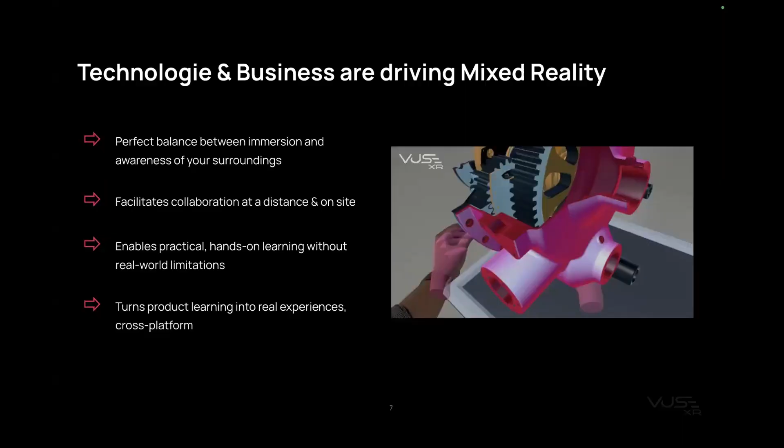HR has also lately been a focus for XR technologies, with AI agents doing soft skill training. This is not a focus for us at VUSE-XR, but it's a bigger movement in the industry—HR and skills development at the soft skill level via integration of AI agents is a booming thing in XR tech.

Speaking about industries—and this is very close to our heart because we come from the industry and are an industry solution—machinery, life sciences, and automotive are certainly the industries driving XR and having the highest adoption rates.

Perfect. I only have one slide, and then after that I will jump into the tool because it's the more interesting part, at least for me.

What Niclas didn't really mention yet is that we, as VUSE-XR, are working on the VUSE-XR Hub. The hub is what we call our tool, so it's the one source of truth for everything, for every input, for every editing, and also for every output. You access the tool via web, as you already mentioned.

We use or apply WebXR as our basic technology to create and share content, and you access it on your web browser, and you can also access it on any HMD or general XR device, and also on any browser, of course.

So that means since you're using WebXR, you are independent from most of the hardware. Is that true? Yes. Do you run on MetaQuest, you run on Apple Vision Pro? Yes. And also on an iPad or a PC? iPads are a bit problematic, but we're getting there.

We will probably develop a native app for iPads, for iOS in general. Vision OS is a bit special. Vision OS supports WebXR, but iOS is a bit more constrained, let's say.

So that's a huge benefit for you because you don't have to develop for individual platforms. Exactly, yes. When setting up our infrastructure, it was an active decision to go with WebXR.

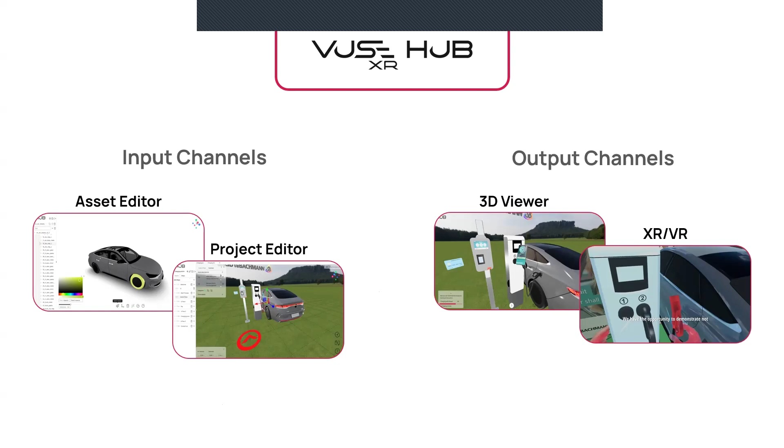I've seen in many different fields that if you have a code environment, you have less people to work with it, and it just gives you constraints in working with it. So I was a production manager for some time, and I introduced a tool for recording data in production, and that was also a no-code tool. By that, I could use the technicians and engineers I had in my department, whereas other departments were relying on external sources like R&D department or IT, and they never found time to do those things.

He was production manager. I understand. This is maybe just an anecdote.

Before founding VUSE-XR, Daniel and I, by coincidence, both worked at the same VR agency. So we come from the old world of software coding, project business, 6 months until your very nice XR or VR project is standing, which from a quality perspective is super nice. However, it's not scalable for the customer. So that has been the whole motivation of starting VUSE-XR, reducing the time from data to XR Twin and from idea to content. That's the whole founding story.

Yeah, or also improvement of, you're doing a digital twin and then you get an idea to change something. If you rely on somebody doing it for you, it's gonna take another month or more. And a couple of thousands of euros. So that's the second part. So it's time and money. Correct. So we really want to make it as easy as possible, meaning we also want to pull as much strings as possible, let's say, from external tools into the hub.

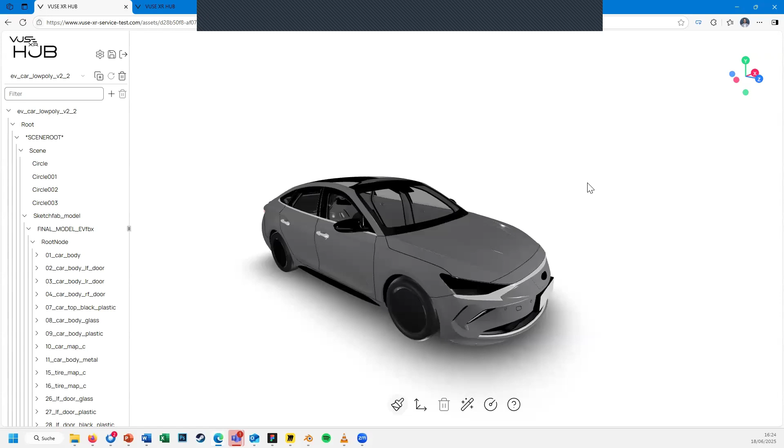As you saw in the slide previously, there are input and output channels. I will first focus on the two input channels, the asset editor and the project editor, show you a bit how it's done, what you can do. And then I will also show you some examples of how this transfers into XR.

You can simply drag and drop any 3D file, for example. Almost every 3D or CAD model is recognized by our tool. So it can even be a step file or anything else you have lying around.

Sometimes it makes sense to take some parts out of the step file before you put it into the hub, because if you have 40,000 parts in your file, you will run into problems. You have to delete them somewhere, and in such cases it's easier to delete them externally. Just one example. But other than that, if you have a car with, as we see here, 47 parts right now, if it's a step file you can just drag and drop it and it's uploaded.

We have a question. So you support standard files like OBJ? Yes. STL, but there's no color to it. FBX, GLB, GLTF, yes, and almost any CAD format, yes. How about USD or USDZ? I think our tool supports it. I don't think we tried it before.

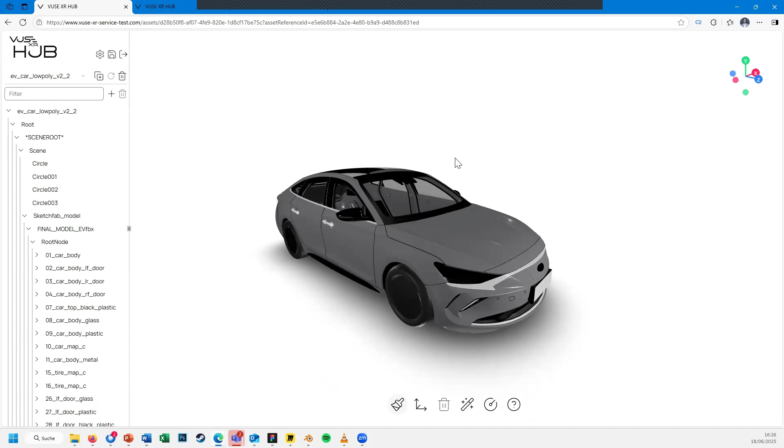After you upload your file, what I always do first is check the performance. We have a few metrics we can access right away, for example the meshes, draw calls, and triangles, which are always important. The memory is a bit minor important, but if you have 1 GB of files to load on your headset, that takes some time, so of course you want to optimize that too.

For high poly assets, there are options to optimize. If you have something above 1 million or 300,000 polygons, you can choose this option and say you want to optimize it to a really low poly count. You click on this and it takes a few seconds to optimize. Let's hope this works now. And you get from whatever you are, 300,000 polys, to, in this case, 30,000.

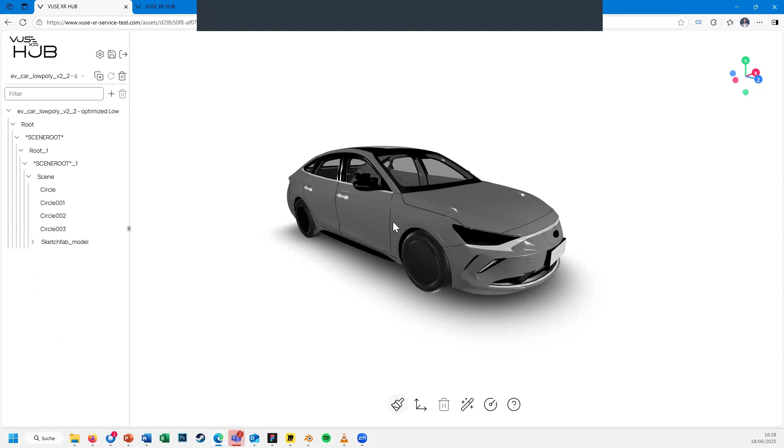Is that reduction somehow intelligent? Does it take into consideration the curvature? Yes, it leaves more polygons if you have curves, and if you have a flat table, it reduces it to a minimum of 2 polygons. So there are some thresholds, it has some intelligent thinking. It deletes polygons that make no sense, like loose dots, and it recognizes edges and curves and so on. We thought about giving all these choices to the user, but it probably makes more sense to handle that internally and just give the user the choice about poly count, which is most important.

We will probably also implement the feature to give the user the choice to remove occluded geometry, if you only want to look at the shell, for example, and all the inner parts are not important.

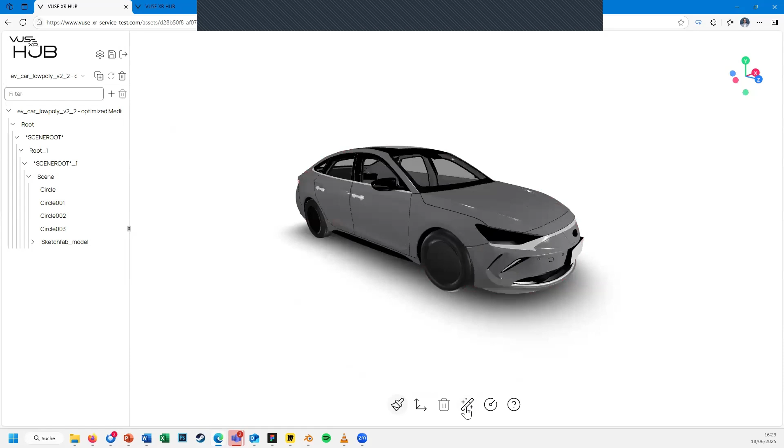So you see the optimization went through. You can also see I already did some optimization of this model before, and now this one has a poly count of 30,000. I can also switch to the other one, I think this one is the 100,000... yeah, so 99.99. So you have options to optimize your assets, and that's of course the first step.

You can also give it a few colors or rearrange stuff. So if you want to make all the glasses a blue color, make them a bit transparent, that is possible here. Depending on what you like, maybe you have tinted glass, maybe it's a bit more black, you can do it however you want. Right now you can give them a lot of color free of choice. We have some predefined materials, and metalness and roughness you can also define.

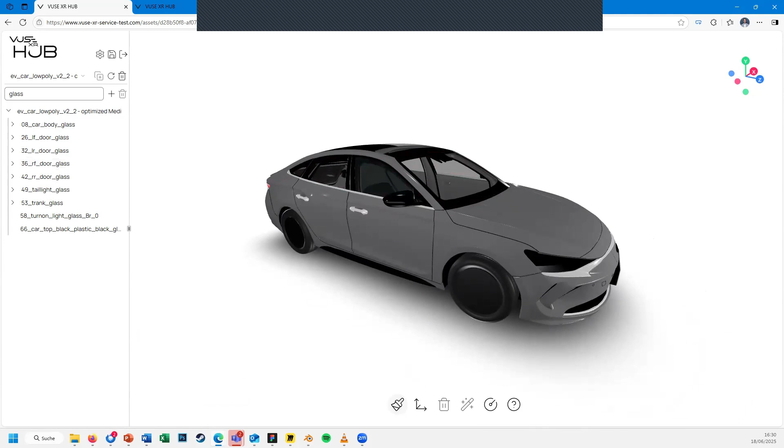Textures, real textures with effects and everything are not included yet, but that's also a feature we will work on soon. And then, of course, you can also move parts. So if you want to place the glass somewhere else, or if you want to fully remove the glass, that's possible. So you have some tools to do that.

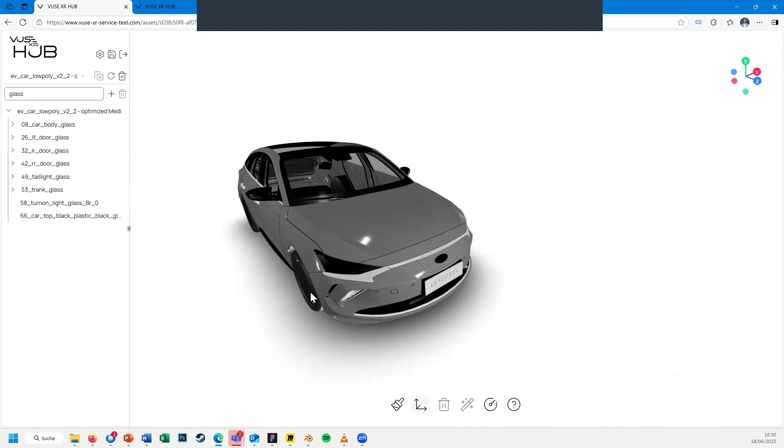Do you have a back function so that you can go back? In this case, we don't have an undo redo function yet, but we have an undo changes function, so we go back to the last save state, which was in this case after the optimization. So now the glass is back. Soon we will also have undo for a few steps, like up to 5 steps you can undo.

Another question - you mentioned you can take away occluded parts, but when it comes to XR, are you using occlusion when you use it? So if I place my hand in front of a virtual object, will part of the object be occluded by my hand, or will it appear in front of my hand?

Your real hand is behind, but we have a virtual clone of your hand, a visualization which is visible. So you will see your hands in a way, yes.

We have that application sometimes when we want to do an assembly training, for example, and we have a fixture - in one of our projects now with a company doing composite materials, they have a metal fixture and you have to place material onto it. We wanted to show where the material has to be, and if you have it placed on the object and then use your hand to place the real material there, the virtual material will appear on top of your hand, which is kind of irritating.

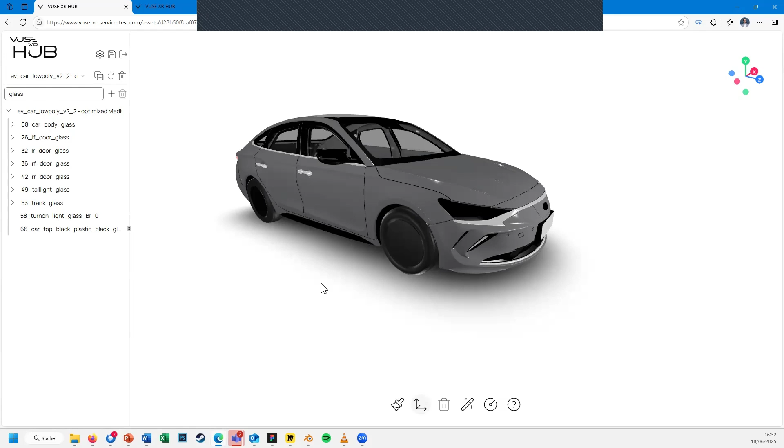Just a few more hints on what you can do here. As I mentioned, you can modify the materials, you can modify the whole asset or the sub assets, and you can add some sub nodes. For example, if you want to rearrange nodes into each other, you can drag and drop them, or say you want a new sub node, you rename it - maybe you put all the glasses in one node, etc., depending on what you exactly want to show. Maybe you want to have all the glasses later fly out of the car or whatever.

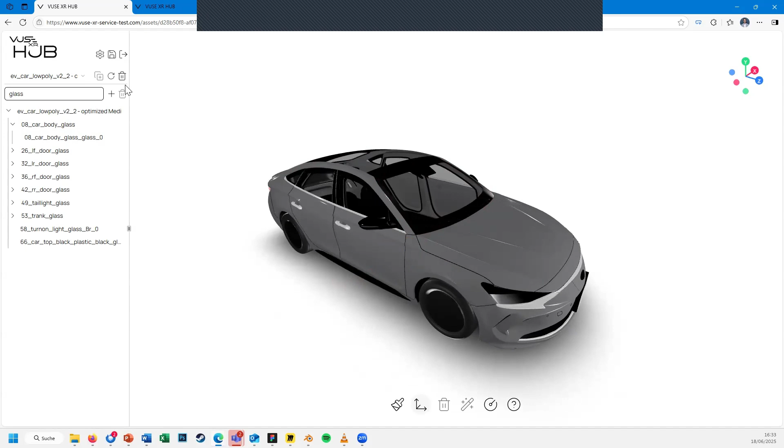You can, of course, create copies of your car. So if you want to have a blue and a red car, one with or without glasses, you can do that as well - you have to save, of course, before you do a copy. And you can also add some descriptions if you would like, so this is the gray car, for example.

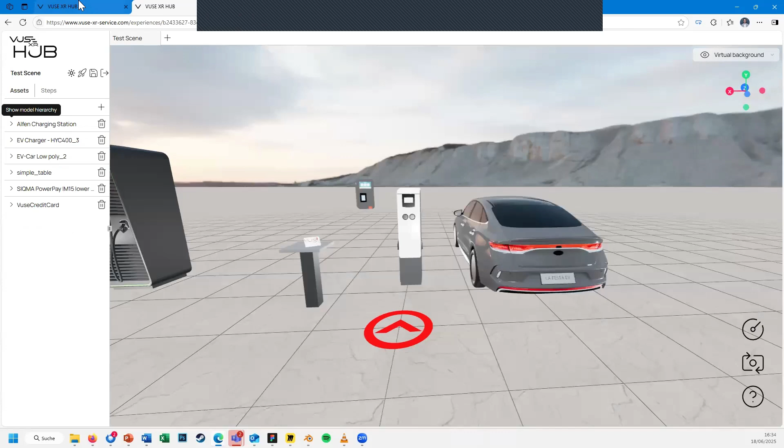That's, I think, most of the important info for the asset editor itself. Now going to the project editor.

Since Christian is here, I thought I'd pull up one of the internal test and review projects we made, to have a look at the scene itself. So this is the PowerPay here from Scheidt & Bachmann.

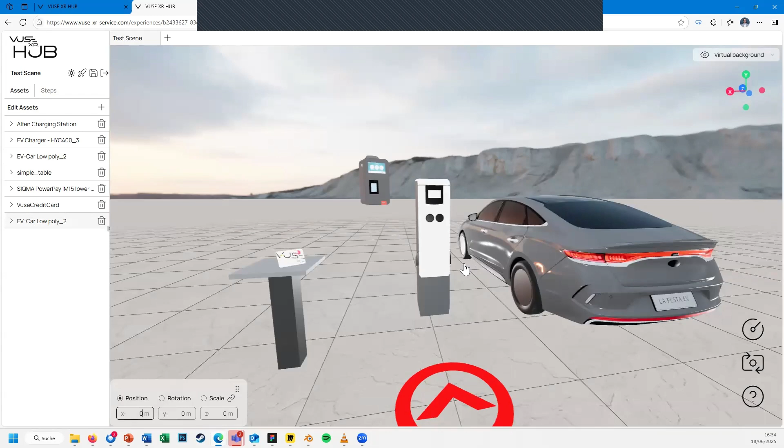You can see the Alfen charging station, the EV charging station, the car itself, and the credit card. Those are basically objects that were dropped here in the scene. Let's go to EV car and put this car in the scene, and you see it's the same car. I'll delete it again so it doesn't disturb us for the rest of the session.

But that's basically how drag and dropping assets here works. You can also upload files right here if you have a small, maybe not too important asset that you already have prepared. You can just upload it right in the editor and place it in the scene, and you can also create some special assets right now.

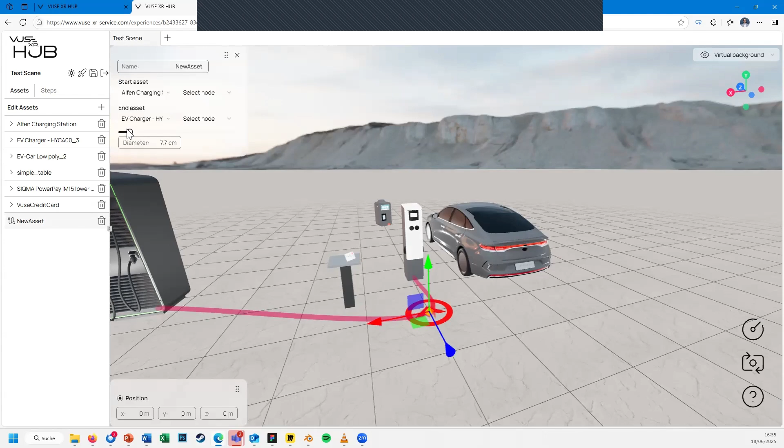Special assets in this case means cables. We just defined that feature for adding cables to your scene. You can adjust them in different ways, for example diameters, but that's just a small feature, maybe not important for now.

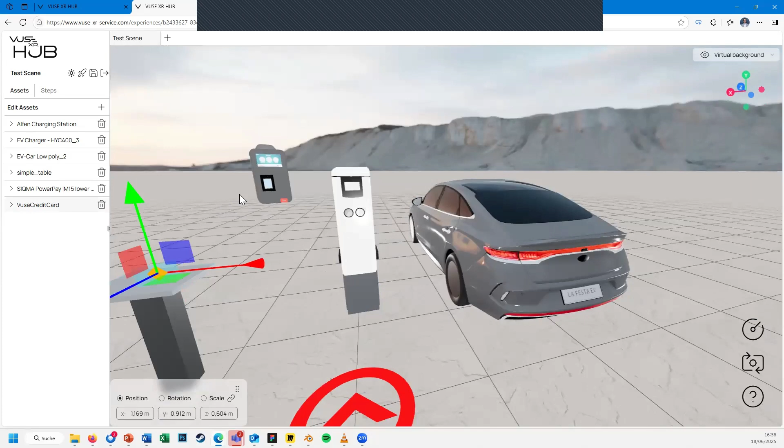Generally, you have your scene here, every asset placed in there. You can navigate around as you would in most 3D tools you know from somewhere else, and you can click on everything. The parts are then displayed here on the left. They are highlighted so you can see what you're looking at. You can, of course, also click here.

You can set different backgrounds. For example, one of our standards are those misty backgrounds, HDRIs. We have a grass field here and a chalk quarry. We also want to move towards a feature where you can upload HDRIs or 360 files, but we're not there yet.

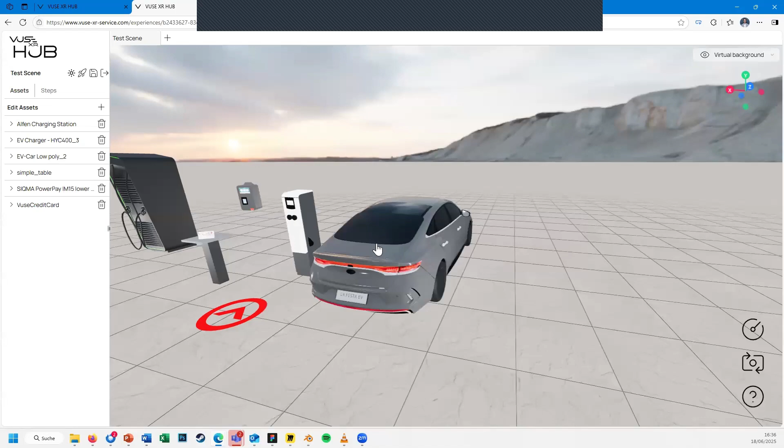And this one's my personal favorite because I like sunsets. Similar to the asset editor, you have a little performance dashboard. In this case, it covers the performance of the whole scene, which is most important for you—you want to see how much is draw call for this project, or specifically for this scene, if I load it in my headset, so you can take that into account and optimize if needed.

I have a question for the import—so you showed importing another car. Will it always be imported to the 0,0,0 origin of the scene? Yes. So every file you select here is basically then placed in the middle.

And then you can move it around, rotate it, and also adjust the size, so you don't have to search for it, that it is somewhere in the scene. It's always set with scale 1,1,1, and then you can adjust it, rotate it. You don't have to search for it—it's always there. The red arrow marks the middle of the experience of the scene.

If you're using a head-mounted display, that is also the place where the user spawns, so it's the reference point from the headset to all the different assets.

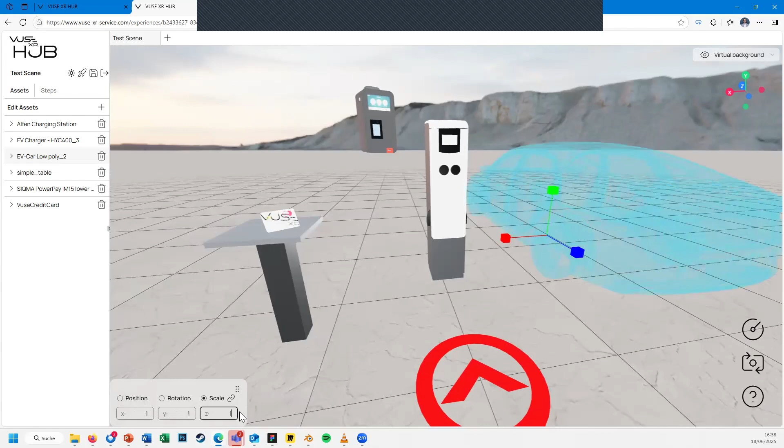I think it's important to mention that you do not need to move things around only with the cursor. You can also place them mathematically correct with the X, Y, and Z coordinates. So if you know it's 20 centimeters, you can just apply 20 centimeters as a distance, or rotate it 45 degrees.

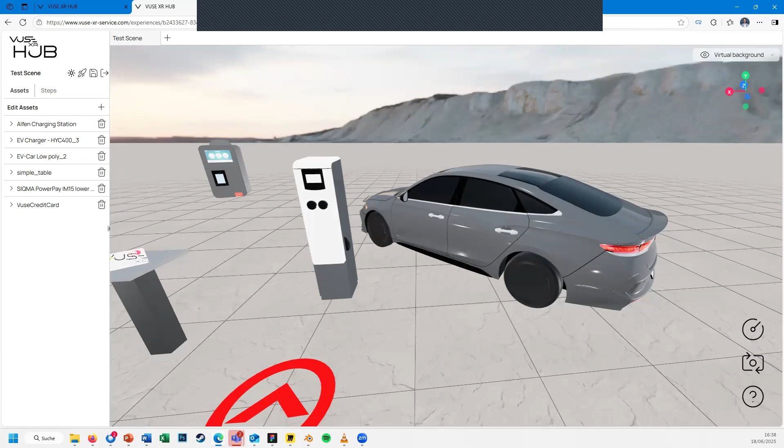Question from Arun: is there any option to place objects with reference to another object that has already been placed, or does it have to be 0,0,0? Right now it has to be 0,0,0. We are thinking about snapping files to each other and to planes, for example, which I think would be a very nice addition at one point. But right now it's basically fiddling around with the controls to find the perfect spot.

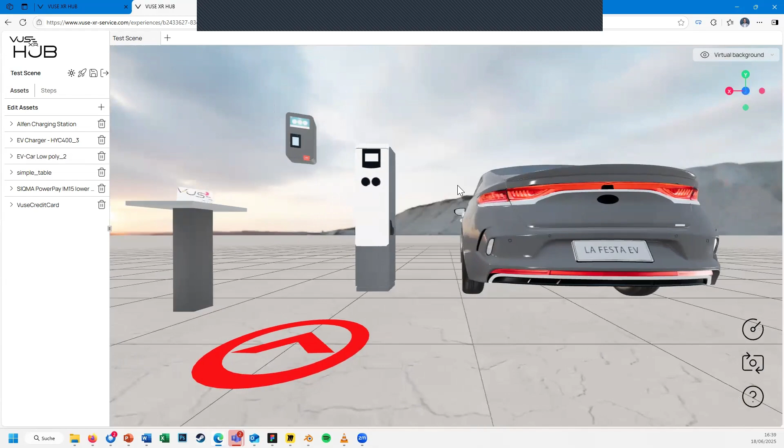You can of course switch to different views on the upper right side, for example to have the perfect straight view. But if it comes to assets that are positioned at an angle, it's adjustments and fine-tuning that you just have to do at one point.

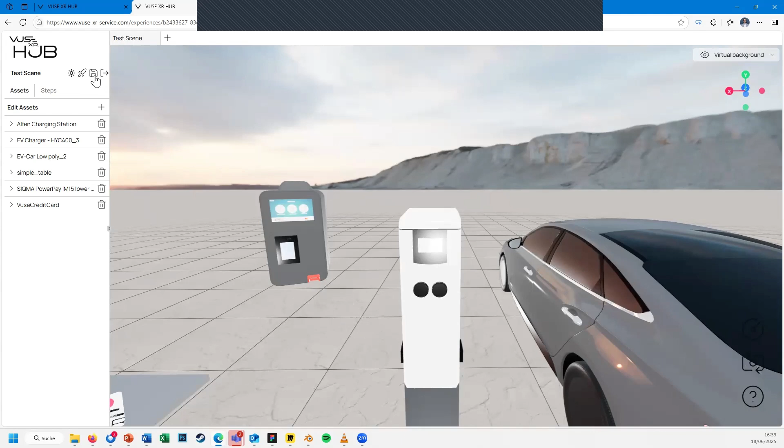So that's the basic placement and setting up of a scene, making sure everything is in the right spot. You can set your camera like this to get a rough idea if everything is positioned correctly. You can also, at this point, just save it and pull up the same experience in XR to have a look at it.

Or if you already know what you're doing, you can just go right away and add the content—the actual content that is interesting. Because looking is nice, but doing is nicer.

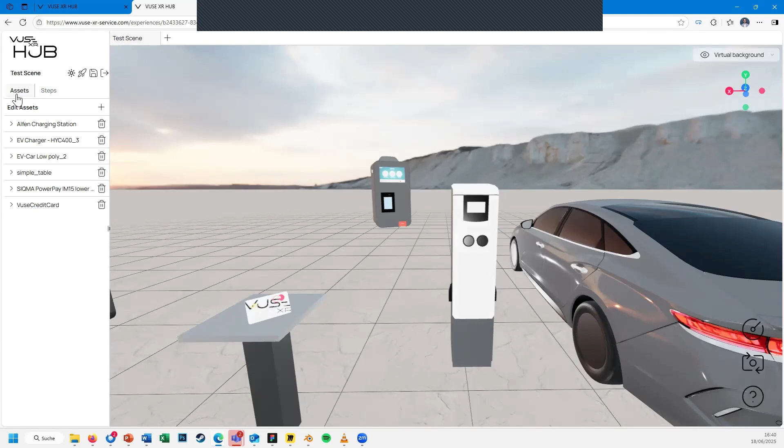And that would be the transition from the assets tab to the steps tab. If you look at the left side of the screen, there's assets and then there's steps, and the steps are what you make of your assets. I added some test steps here, step 1 and step 2. Both have one interaction or content so far, and you can just go ahead and add additional content.

If you look at this one, it's grab and place. As a user, I would grab and place the credit card here in front of the PowerPay. That's the basic interaction. It's also possible to do a grab and move, or grab and rotate—grab and move along a defined path, or grab and rotate around a defined point of origin or axis. Then there are a few additional sophisticated interaction types: animation, highlight, explosion view, cutting plane, a UI interaction where you can display content, or a simple trigger interaction.

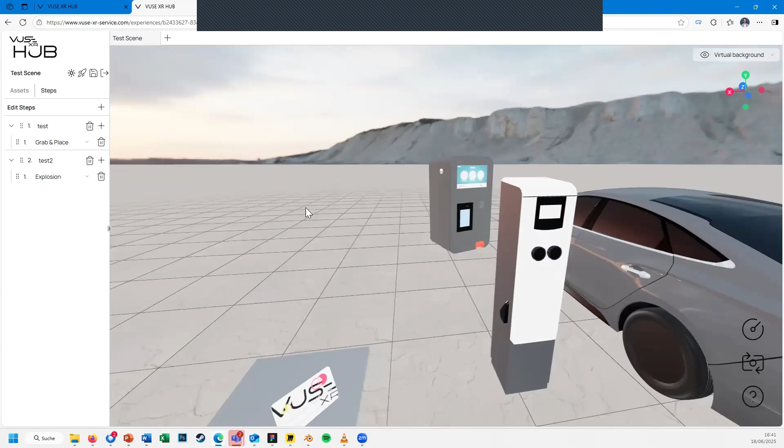I will show all of them with a bit more detail as well. Is that an answer to your question? Yeah, okay, I can wait until you show it.

I was asking what grab and place means. So you will display the destination place with a transparent object, and then you can take it and move it in all dimensions until it gets to the transparent ghost object where it exactly should be. So grab and place in XR terms means that when you grab it...

First off, there is a highlight or a guidance system in XR itself, which will display everything you need to know, because in XR it can be guided, but it will mostly be a self-guided interaction sequence. You will also see more about the different guidance elements that we have.

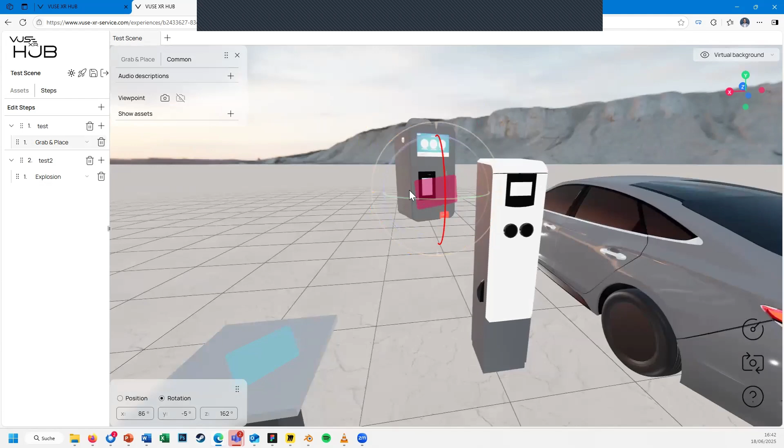But yeah, grab and place would be just simple—in this case, I defined grab the credit card and place it here. I can adjust it however I want, and of course also rotate it around, however the credit card in this case needs to be placed in front of the device. How do you assign the grab and place?

So we get into steps, and this was assigned to the credit card. So where do you select the credit card grab and place? Exactly—so I would now add basically one interaction per type and explain it in more detail. But good question: the first step, you click on the plus and select one interaction type.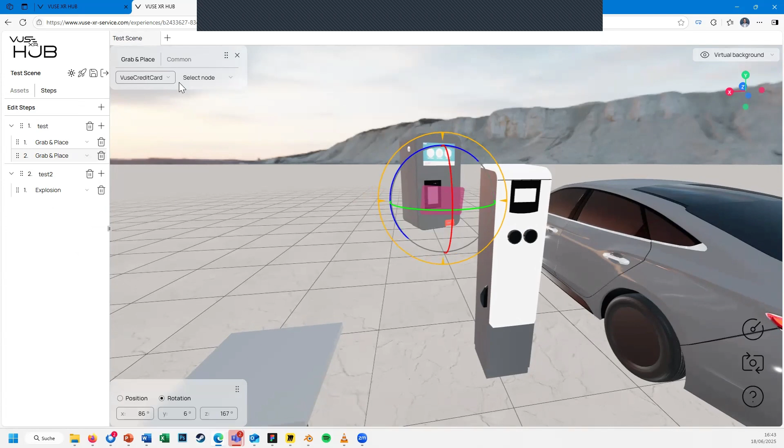Grab and place, which I just described, is defined as you grab one object and place it somewhere. This can be the whole asset—for example, I could grab the whole charging station, I could grab the car if I want, or grab the credit card again, and then place it, for example, on the left.

I can also do this if the object has a subnode. For example, if I select the car and select a subnode, I have to know what I'm looking for—let's say I want the glass. In this case, the user would need to grab the glass and place it on the side. So subnodes are available as well.

That's good for assembly or disassembly relations. Exactly—the basic idea is you import the whole device with all parts and components, and then you can sub-select the parts and components. It's important to have the nodes available for interaction, otherwise you'd need to import 20 parts to have one device. That's where we always go from the head product, so to say.

For each step, you can then add audio descriptions, for example—you grab and place this somewhere—and you can select different languages. I'll delete them again because otherwise it will throw errors, but they are transformed into voiceovers which you can listen to in the 3D viewer or in XR.

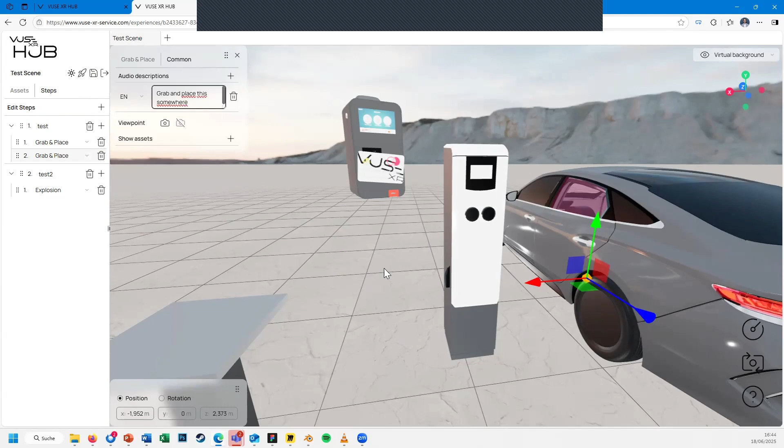So when the step is activated, as in this case when the prior step is finished—for example by placing the credit card—the voiceover of this step plays back to you, telling you what to do in addition to the hologram you see. So in XR, I would see the glass is highlighted, then I grab the glass, and when I grab the highlighted glass, a hologram appears on the left side, and for the user it's then pretty obvious: okay, I need to place it there.

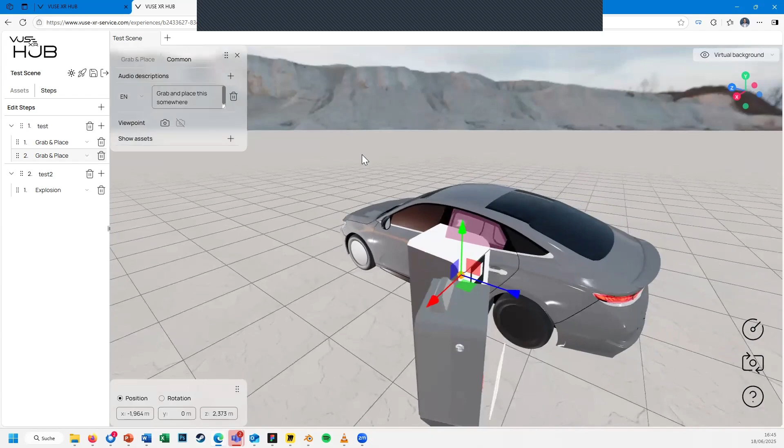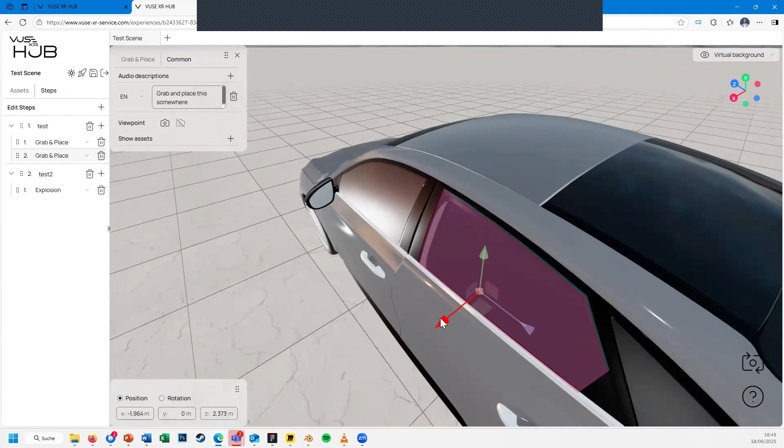For the 3D viewer, you can set additional viewpoints, which you'll see later what that means. Of course, we don't want the end user to fly around searching for the perfect position. As the product specialist for the car, the PowerPay, or the charging station, I know which interaction sequence to look at. So I say, when this window is grabbed and placed somewhere, I want the viewpoint to be like this. In the tool, in the output channel, the camera will automatically move to that position and look at the car or the window.

You can also show additional assets. If during this sequence you'd like to show something, let's take something simple, like the logo from one of the Scheidt & Bachmann product series. So when the user grabs the glass or when the step is active, they'll also see the picture displayed in the back, which I can also transform as I would like.

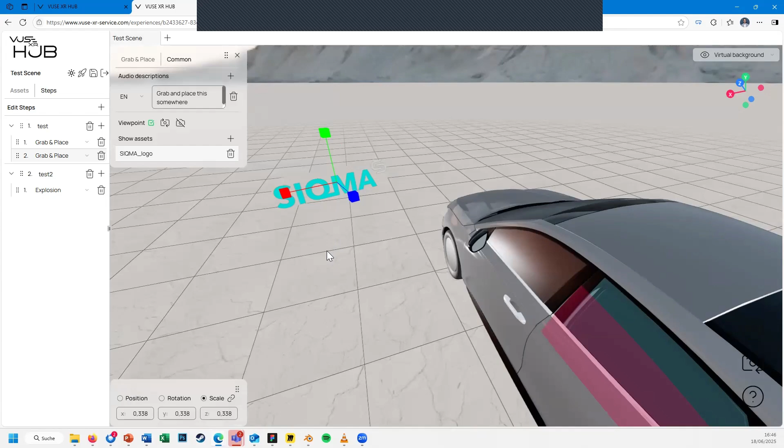The system itself wasn't developed for simple grab and place, but more for screen interactions, for example on the PowerPay like this. But it can be used for many different purposes, which is basically the case for most of our tools and features in the VUSE-XR hub. So you can abuse them for whatever you want. It doesn't need to be a PDF or picture - it can also be a 3D file. So if you'd like a trash can to appear and you want to throw the glass into it, that's totally possible.

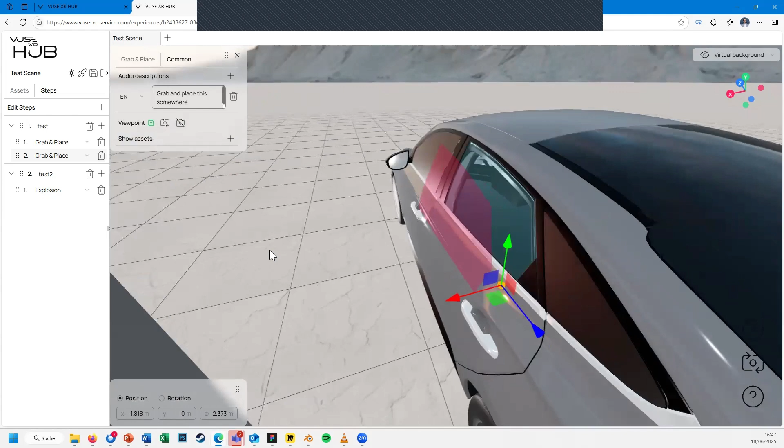There's another thing that comes to mind, but it's a little ahead. So when you've created all this, you probably want to give access to a user by just scanning a QR code, which will lead to your demo, your simulation. Is that possible, or how do you do it? Yes, that's possible.

That's a bit forward, but with regards to the output channels, we have different ways of making it publicly available, for example. Not fully publicly, but you can create links and also hide these links behind QR codes if you'd like, or put them in an e-learning course where people can click on it, or whatever you can imagine. Next to that, you also have account-based sharing, of course.

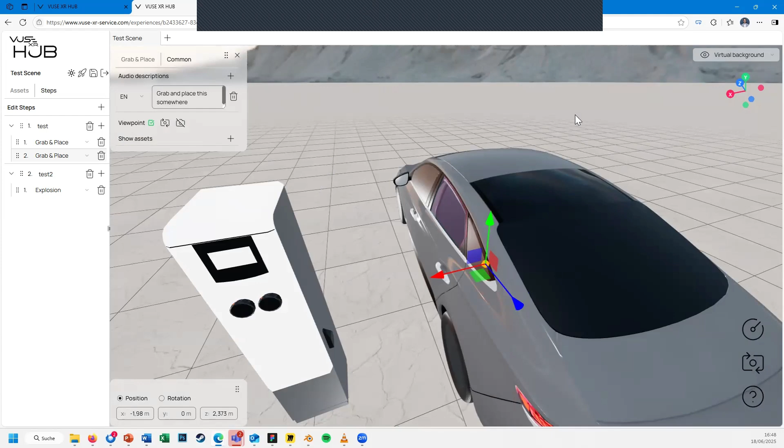Daniel, maybe it would make sense now, before we go into all the other interaction types, to go into sharing, because then we see the whole flow.

Let me quickly play through one of the sequences. I'll just click forward. You don't hear it right now, but there are voiceovers playing all the time - it's not important, it's annoying to hear all the voiceovers, so I'll just click through it. I'll even move it a little bit here. You see there's an animation, and now there's a disassembly procedure of the whole gear. As a user, I would have to perform all these steps. I'm using it in the web browser now, though this was designed mainly for XR. In XR it's a nice interaction sequence - I'll show XR later.

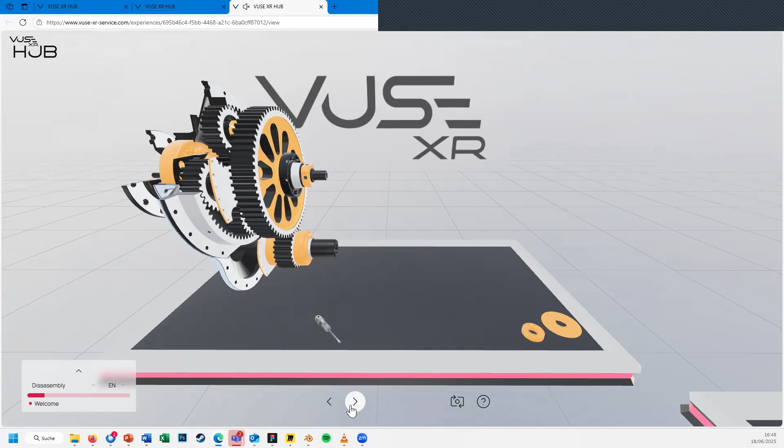And so the animation you've seen, the rotation, is also something you can assign in your environment. Exactly, yes - placing a screwdriver, rotating the screwdriver, then placing the screwdriver back.

Then I'll click a bit faster because not everything is very interesting here. But all the screws are removed, the ball bearing is removed. Maybe you can enlarge the text field so we see what the voiceover would say. So the text you see on the left is exactly what you get as the voiceover, what you put as the audio description. Exactly.

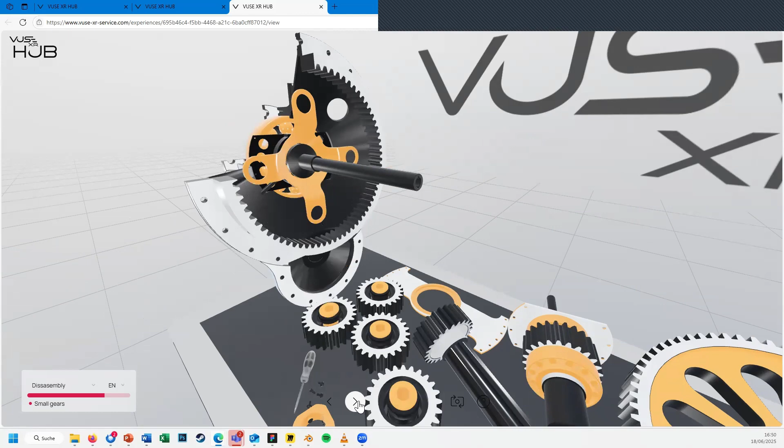So let's go a bit forward - let's see, all the pieces are flying down. What's interesting here is there are a few UI interactions in between. You can put pictures in them, of course, and they're just a way to convey, for example, some additional information that is interesting, or that the user should actually read, maybe, or look at.

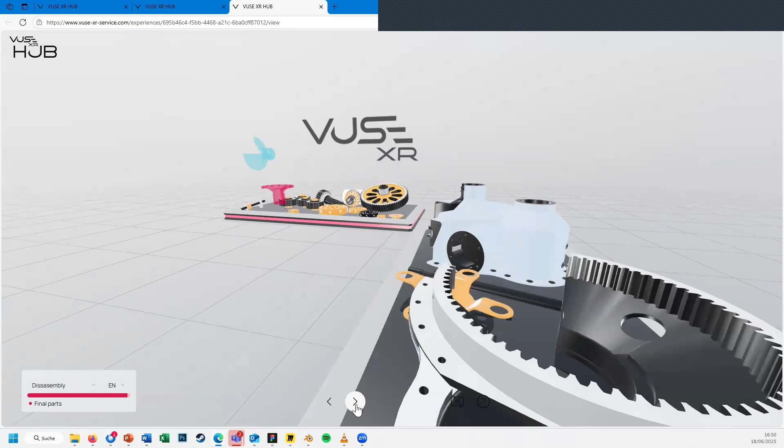Another question comes to mind. We are collaborating with a restoring company of antique cars, and they want to do something like this for instructions. When they get a car from a customer, like a Ferrari, and do a service, they'd like to easily create something like this, but usually they don't have 3D models from a Ferrari from 1950 or so. In a project last year, we used scanning technology to scan objects, and you get quite good scans in a short time, but usually with too many polygons. So if we used your tool, would there be functionality to reduce it? That's something I'd like to try. My question is, do you have other customers who aren't coming from CAD models, like this one, but rather from scan data? What's your experience with this?

Yes, it's a commonly requested feature to also use files created with Gaussian splatting or other ways of generating 3D from 2D information, or from scans. There are some problems with these files, mainly that they're typically one file, which you can work around in a way. Not completely in our tool, but generally, yes, it's a requested feature and people want to do that more and more. Especially considering that even construction companies that create devices like this gear most of the time have the gear itself, but maybe don't have the additional tools. So they also want ways to scan their tools, ideally with an iPhone, just going around it, uploading it as a GLB file into our tool, and using that in training, for example.

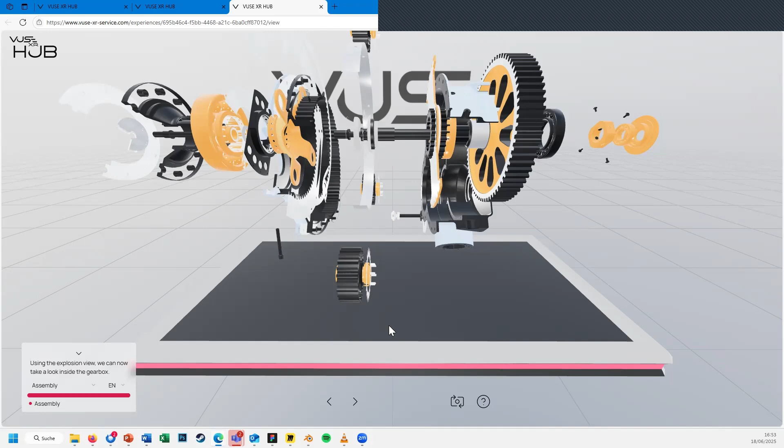These days, of course, an engine from a Ferrari from 1960 is hard to model, I'd say it takes months. So having your GLBs and your student team scanning this is of course the nicer way. Yeah, it's a project we're going to do. The next one will be an engine from a Ford Model T.

I'm part of a club of Model T owners, and in February we'll have a meeting where we disassemble some engines and work on technical issues and learning how to do it. We'll take some students to scan the parts. So we take it apart, clean it, then scan, and then assemble again. Also virtually, then, with all the scanned parts. That's the idea.

Do you have experience with good scanning technology? I tried the big industry scanners from Keyence and Zeiss, these high-end solutions, but do you have more mobile solutions tested yet? Yes, we have a scanner in our lab which costs around 1,000 euros. It's very cheap, but good enough for scans for visualization. If you want to 3D print from this afterwards and need a very accurate model, it's probably not the best choice, but for visualization and training, it's a good choice. Tom Fisher from Classica was amazed that in that price range, for 1,000 euros, you can get scanners capable of doing that.

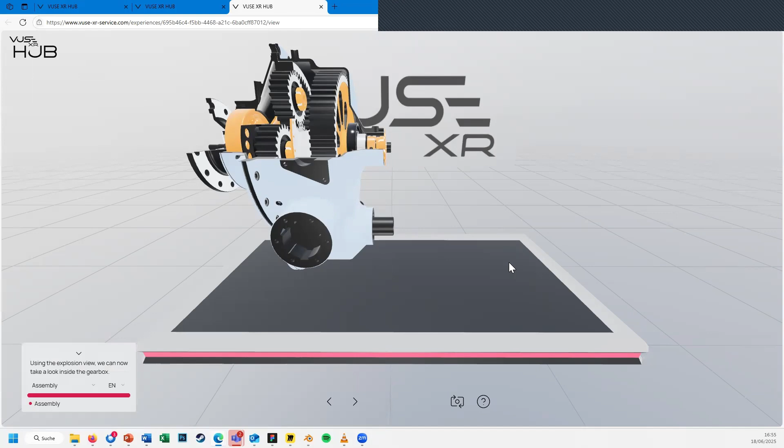I tried a 60K device last week and was also amazed at how capable it is. However, this is quite an investment, and I'm interested in a 1K solution as well. So we need to speak, Andreas. Yeah, no problem. We have two scanners I could recommend for you to try. Yeah, we'll speak. All right.

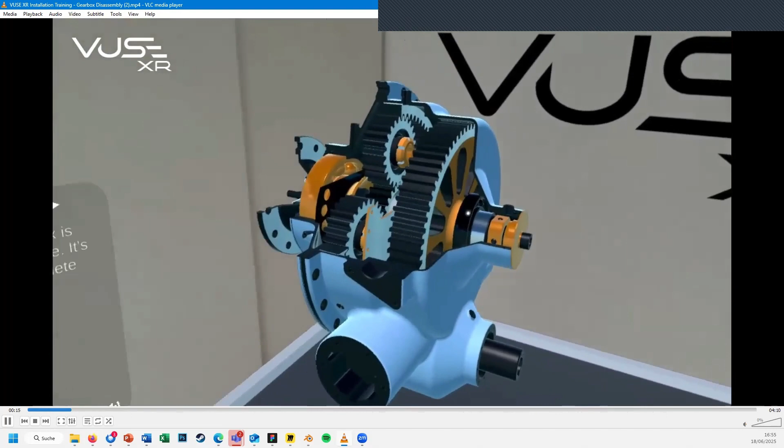Let me also quickly show you how this looks in XR. It's easier to show a recording than to jump in XR right away, but I guess most of you know Meta and Meta streaming. Of course you could also stream it right away. This is just one of, I think, exactly the training I showed you before in the 3D viewer, recorded by Niclas in this case.

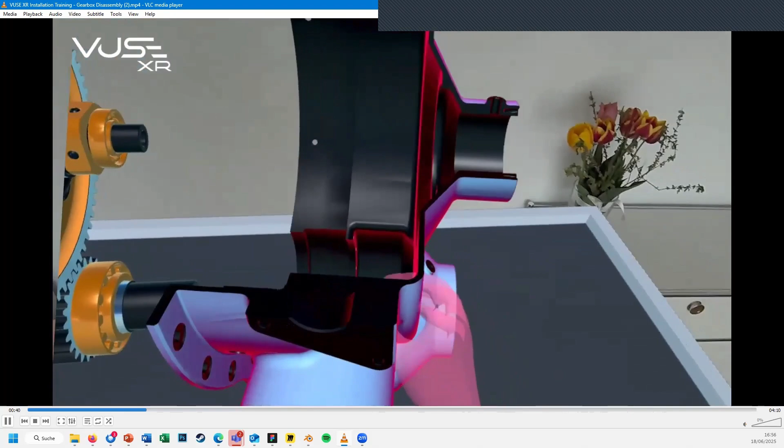You see there's a simple UI on the left side. He's not really looking at it right now, but there's a UI that you can use to control the main setup and everything. So once you start the setup, you go into the browser on your Oculus Quest 3, for example, enter VUSE-XR Hub, log in and choose the training.

Then you go into this experience. You have the menu on the side and you can just do the sequence. You just press start, do the sequence. Everything is guided, as you see. Objects are glowing, and in this case, you can, of course, stick your head in.

For everything you do, there's basically a little command and also a voiceover telling you what is happening right now. And there you could see the UI a bit more. You can also grab it and place it somewhere else. Very nice, yeah, I really like that.

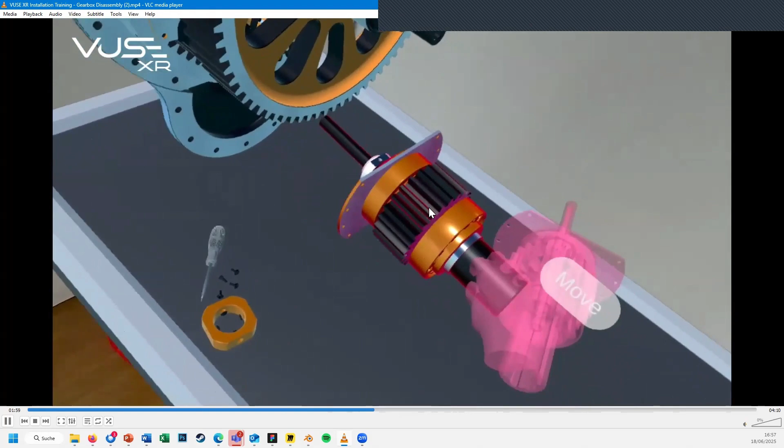That's a nice task now, seeing from XR which actual interaction type we used. Hopefully you find the one-to-one relation between these types, but it feels pretty natural. So of course this is a grab and move, and this is a grab and place. I guess you will figure out what is what.

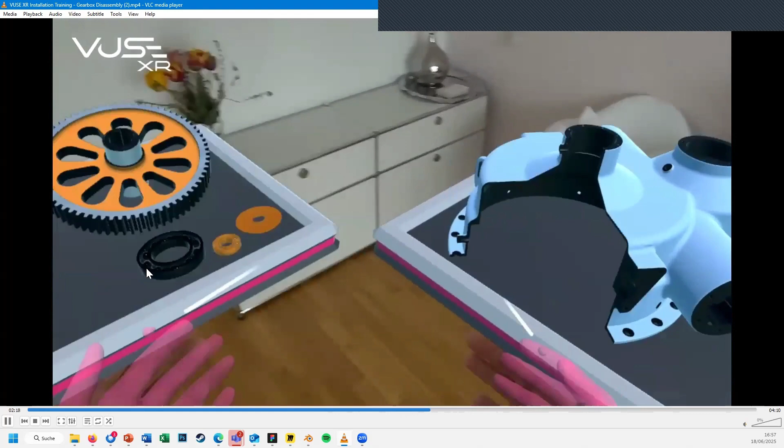You could see that there were also some additional tags on the assets. So you can also add some additional layer of guidance if you really have, for example, a new user trying on the headset. Sometimes it makes sense to have this grab flag just right next to it.

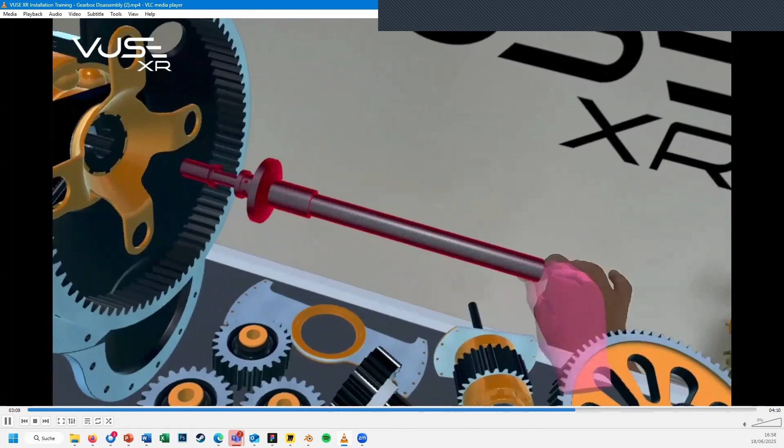There he disables it, and the rest is basically, you can see some animations here. So in this case, the part is triggered, and then it flies over some defined path. Technically, this little wheel could rotate at 20,000 rotations per minute for 1 minute if you would like, or do whatever kind of animation you would like.

If you want the asset to rotate around the user, that's of course also possible. You can define viewpoints and then exactly where it goes.

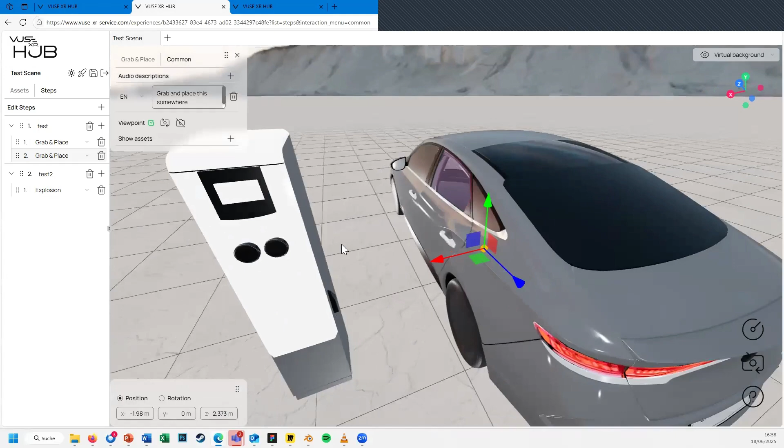I would maybe show a few more additional interaction types here in the tool and how to set it up, just so you see a little bit and get a feel for how it works. And then you can also ask some more questions if you would like.

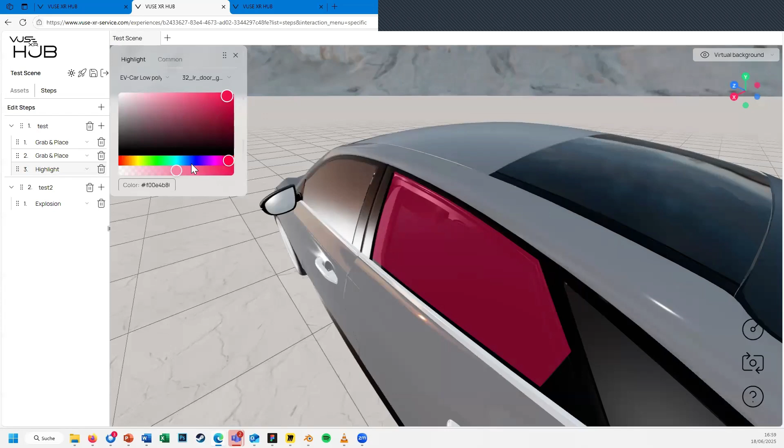Adding here one thing, which is a highlight interaction. Highlight meaning you just want to get the attention of the user for one part. In this case, triggering the highlight does nothing except triggering the next step. As a user, in this case, for example, I set a color, so a glowing red or glowing green, and in XR, the part would highlight in red. So the user, for example, with the voiceover, would get some information about especially this part.

Then, highlight, grab and move, and grab and rotate are pretty self-explanatory, not too interesting, but let's go to the explosion view.

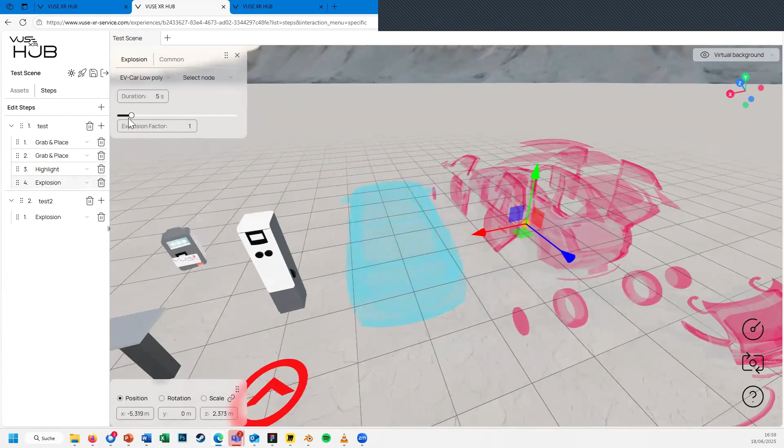So for an explosion view, for example, you select the interaction. You can choose the explosion factor, so if you want it only to slightly explode, or if you want to fully explode all around the user. It can also rotate around the user completely, with the user standing here in the middle.

Oh, I can't hear you anymore. Yes, I think now we lost Daniel. I guess he's coming back in a sec.

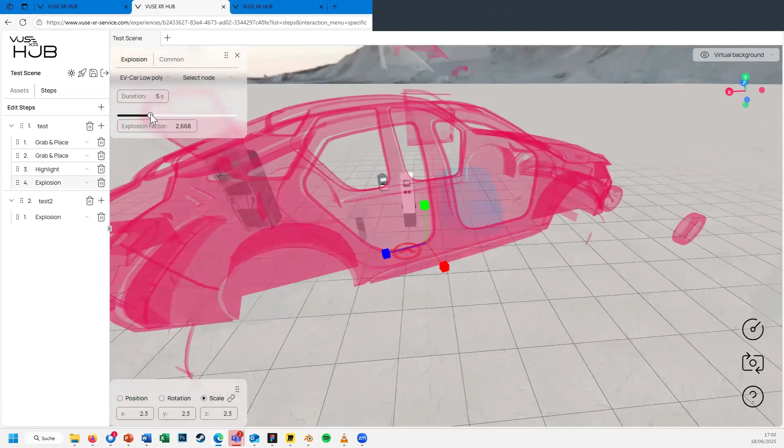Now you're back, okay perfect. So I was just mentioning you can also adjust the scaling factor and everything of the car during the explosion interaction, and place it wherever you want. Just put it back somewhere.

And I assume for the explosion you have predefined paths for each part, and how do you determine where the wheel should go to? So right now it's automated.

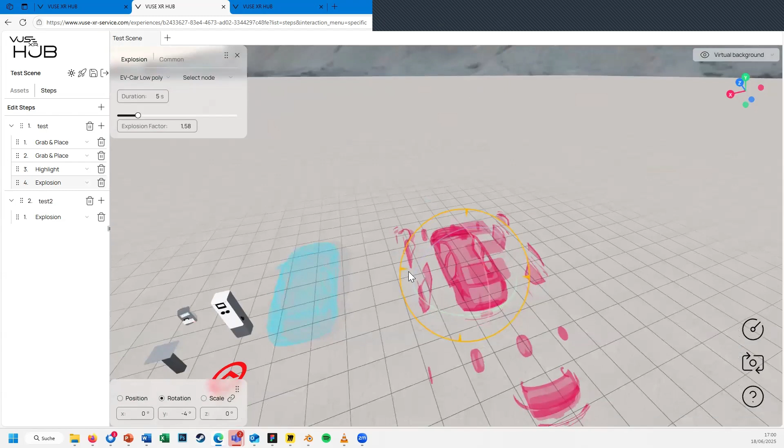So the parameters you define are the explosion factor, which defines how far outwards the explosion goes. And you can define the size, position, and rotation of the final state. So if you wanted to explode and grow in size, for example, and get much bigger, that's possible. You can also let it shrink, if you wanted to explode and just shrink somewhere.

But if I want that to, for example, not go to the floor in Z, but more just in the X direction? We will divide the explosion factor into X, Y, and Z directions. This is basically the MVP version of the explosion factor.

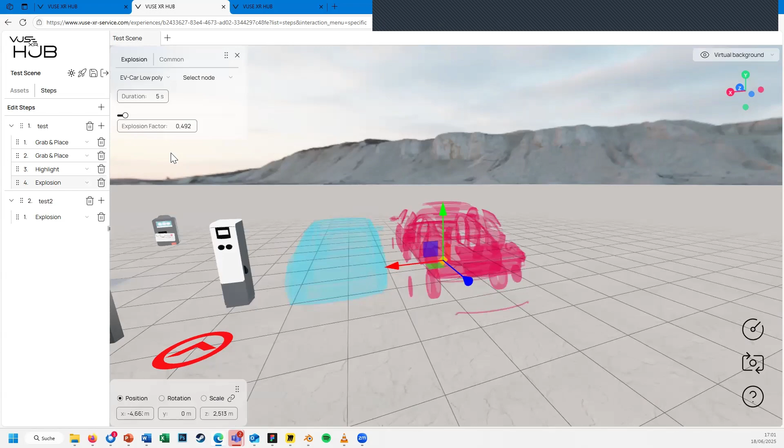It will soon be possible. So you can basically say it should only explode in the X direction, for example, like in one positive direction, and not in the other two directions. It could be interesting if you have one asset placed on the table and you want it to explode to the side, like a harmonica. I guess you can imagine a lot of different ways to use this. But yes, this will be possible. It's not possible now.

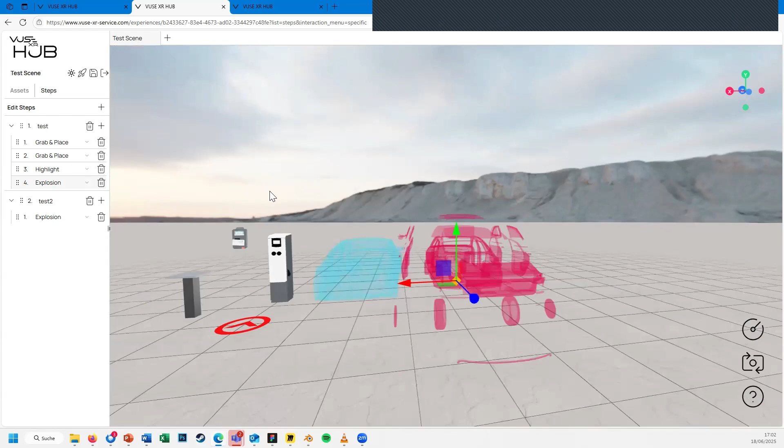And you can also choose the duration of the whole animation. So if you wanted to explode very fast, that's also possible. Or if you wanted to take some more time, you could set it to, for example, 10 or 60 seconds.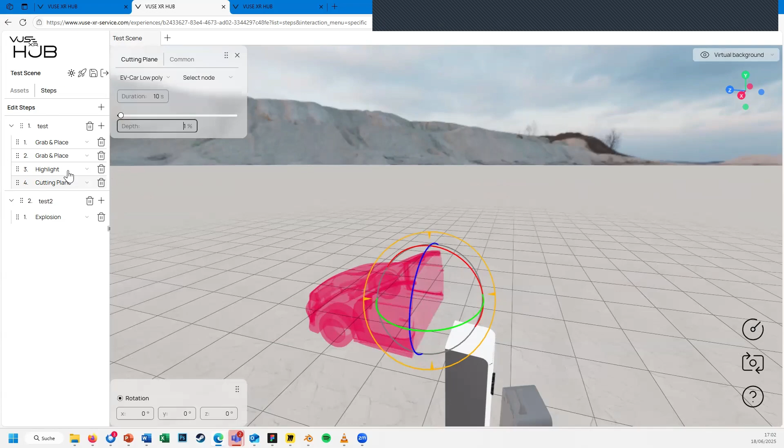Then the cutting plane is also quite interesting. It's pretty much a standard exploration tool in many XR applications, and as the name says, it's a cutting plane of, in this case, the car. You can also choose different hierarchies, so for example, if you only want the glass to be cut, that's also doable.

So you can adjust the angle, for example, and with this, I guess you can imagine you can also just go down. I think it's slightly not really working because the hitbox of the asset is a bit off. Or, oh no, it's working.

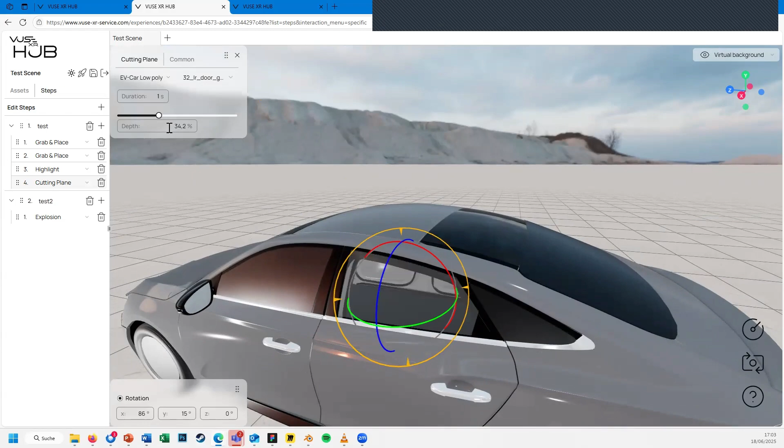Okay, what's the other option? But yeah, in this case, for example, you can just let the window slide down or partially slide it down. And it could, of course, also, as you saw before, cut the complete car in half. Or if you want to focus on the power pack, you could just take the shell of the power pack and let it disappear in a way.

And that's a typical interaction for complex machinery, right? Where you want to cut away the outer shell and see inside components, or cut 50% through an engine, for instance, to see inside behavior.

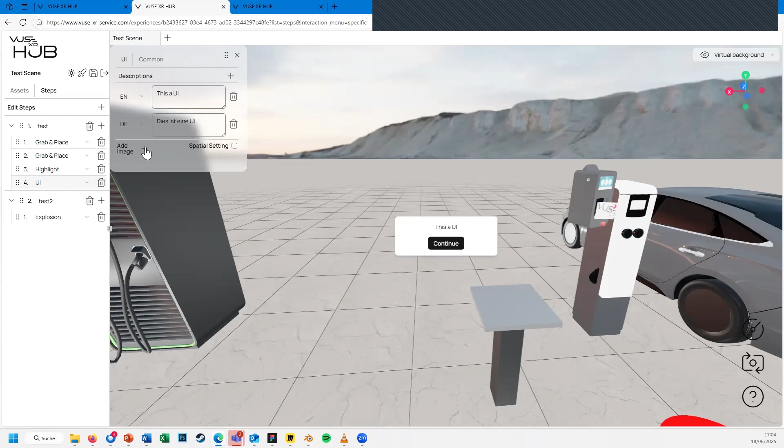Correct. Then you have a UI interaction with the very basic feature of conveying some information, or also in different languages. UI, and of course also here again audio descriptions, and you can add pictures here. So if you want to give the user some more information about how centrifugation works and how to separate two different phases from a sample, then you can do it with that.

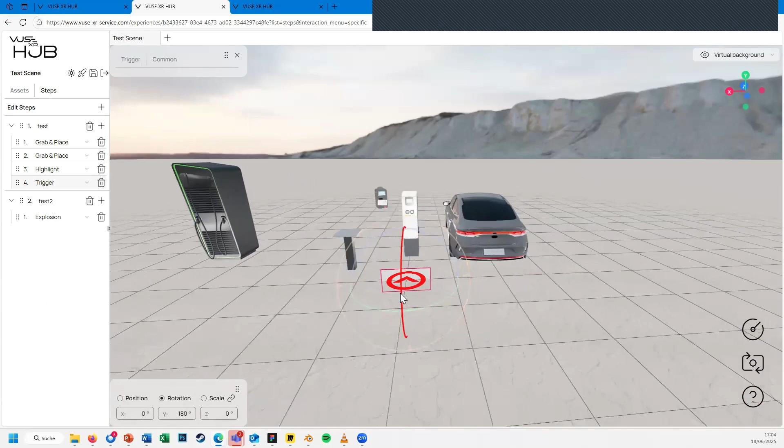The last one, which is also quite interesting, is a trigger interaction, which we developed mainly for screen interactions, for example, screen or UI interactions that are bound to objects. So in this case, you can imagine, I scale it down a little bit and fiddle around and then place it here in front of the power pack. Ideally, of course,

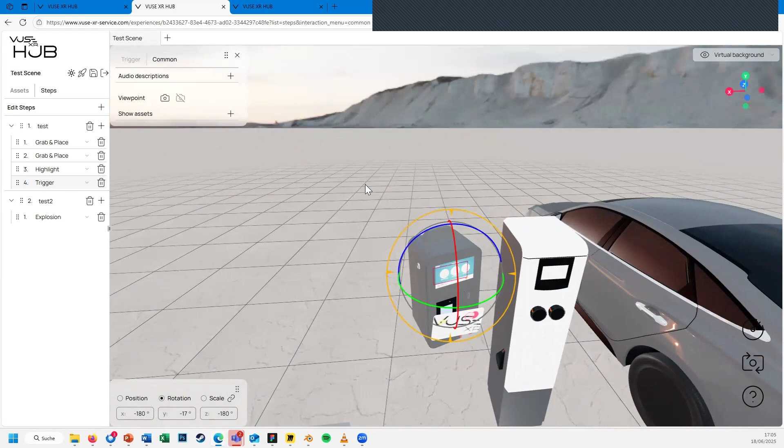exactly in front of the screen. It's sometimes a bit harder, but yeah, I think you get what I mean. You place a UI here. Of course, you can also have, in this case, what I mentioned earlier. So that would be a grab and place. It's a trigger interaction. So what you do is when the card gets to the trigger, then something happens, or no, you poke the assigned area. So what you technically do is you assign an area that needs to be touched, poked with your fingers, or clicked on, activated, and then you go to the next step. This is what we technically do.

Okay, so like a button interaction. Correct. It's for screen interactions. It's for buttons, basically, this is where we designed this for. Yeah, if you place the credit card in front of the terminal, it should enable the payment, for example.

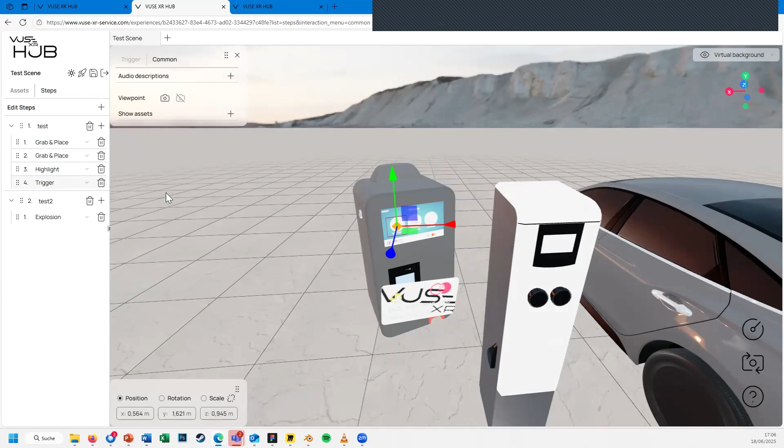So I had in mind, you take a grab and move, and when your hand is interacting with the trigger while placing it in front, then it will activate. Is it like this? No. No, but a nice idea, Andreas. I like how you think. That's a pretty cool idea. Yeah, that's a good idea. How would you do that interaction?

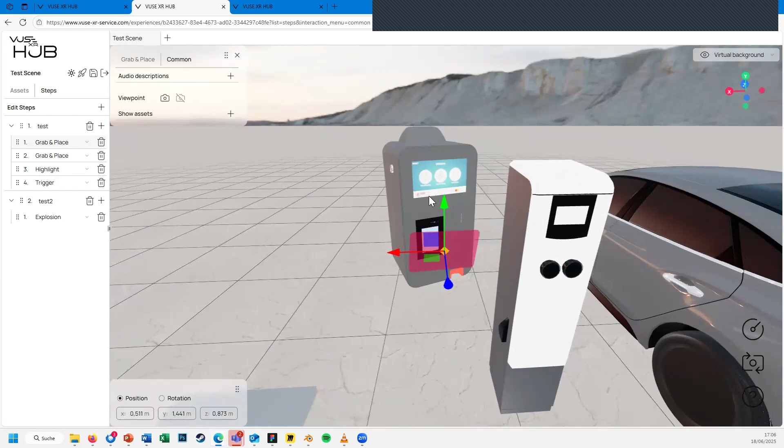Because the grab and move has been executed, then the next step will be that you take the pump and fill. I can tell you how I did it for Scheidt & Bachmann, for Christian Lischka. So basically the way we did it was we had the user click through the start screen with triggers, right? And with each trigger, the next step was triggered. And with each next step, a different picture was displayed on the screen, a different picture as a side asset here. Okay, so it looked like the screen was operating. It looked like there was something, the asset.

Itself was changing, but it was only active during that step. So for each step, you could define one UI or one picture in front of the screen. When there is an interaction where you grab and place the credit card, you would present your credit card on the screen displayed here as a picture. When you presented it, when you place it there, it would switch to now enter your PIN, for example. And then you would trigger the PIN pad and enter your PIN theoretically.

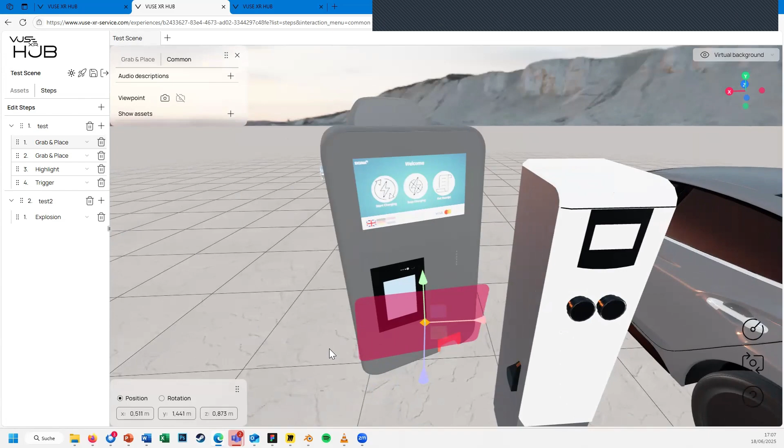Yeah, Andreas, you remember the video I sent to you? I can gladly share the video if it helps. We can also share some material afterwards. We also have the recording of this, like the official after movie, of the Scheidt and Bachmann experience. Oh yeah, I saw that on LinkedIn, exactly. I just thought, oh my God, what am I talking about. You were a natural expert, Christian, so don't worry. It's been really great, I got such nice feedback from your interview. So don't worry. Yeah, it was fun.

So those are the main interaction types. You can set up many steps, adding one step after the other. This way you can add some kind of hierarchy to your scene, and then you can also add additional scenes with either the previous assets.

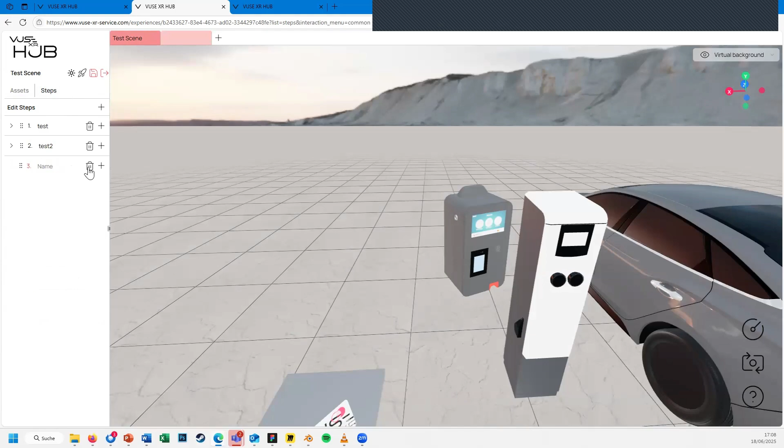Now everything is red because I didn't give the steps names. Our tool doesn't like it when you leave stuff unfinished. So let's do it like this, test. Now everything's not red anymore.

But of course, in this case, another scene - you could, for example, set up another chapter of your training, or you want to display something else, maybe all the red and blue and green cars that you would like.

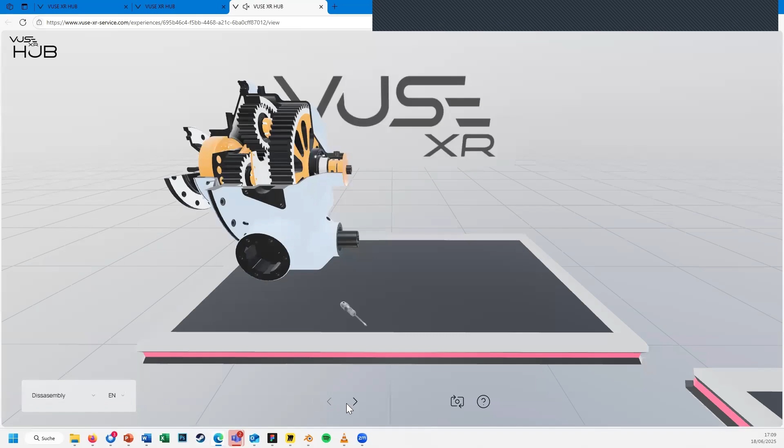Then, if you're in XR, you would load a new scene, or as you also saw here, if you go to disassembly, I'll just click through everything, basically play through the sequence, do every step, hear all the voiceovers, and then in the end the new scene is loaded in this case.

And here you see I can also select the scenes separately and the voiceover language as I defined in the tool.

And Niclas, what we're missing, very important, is how to share. This is what Andreas asked for, right? So experience overview, sharing permissions, revoking. I think that's important. Yes, correct.

Right now we have a simple thing here. These are basically all my experiences. I can, for example, say I want to share test experience 1, which I already shared with others. It's shared with others, and I can either create a public sharing link - if I click here on this one, test experience for sharing, submit it, and here copy and paste the link. You see it's a link, enter it somewhere, or can enter it here. And this loads the experience, even if I'm not logged in with my account. So this is really a public link. I could go in another browser or share it with you now, and you can have a look at it.

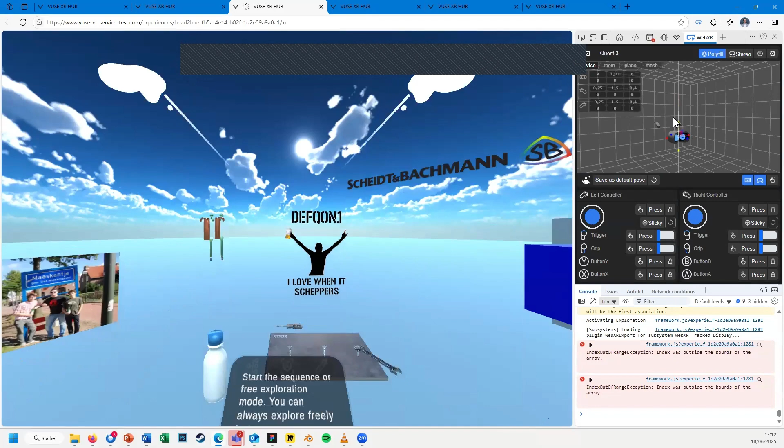Of course, if you don't have any device connected, it won't help you a lot. There are ways to access this with some developer tools, like WebXR integrations. You can do stuff in the browser, but that's maybe not the most interesting for you. It's just a developer tool we use for troubleshooting, because it's easier than to always jump into the headset. But it would be the same on the headset.

So you have this browser basically open in Oculus. You click on the button and then you see this one. And of course, you would have your hands and see everything, as you.

Now, anything I left, Niclas? I think we covered everything. I think that's just the starting page of the VUSE-XR Hub. So you showed the editors, but this is how it looks when you start our software. You have the asset overview as inputs, the experience overview for creating your projects, and of course a small wiki answering the most pressing questions if you encounter any problems. There's some Q&A, and if you don't find an answer there, you just give us a call, reach out to support@fuse-xr.com or to Daniel directly, who's in charge of our university cooperations and helping you craft the content, to create the projects.

As you saw, it's pretty self-explanatory, but if you have a certain problem to solve and showcase, sometimes it's a mixture of different interaction types and features we're having, and that's not what you know natively. So don't hesitate to reach out to us and ask Daniel, and he's gladly supporting.

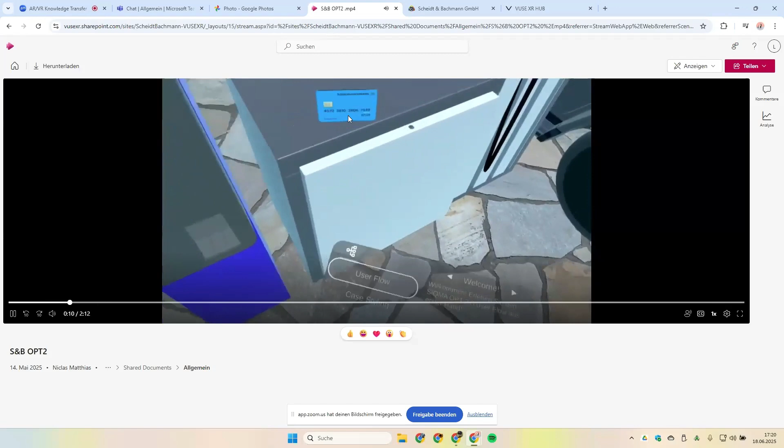This is what you see - you are in front of the payment terminal. You start by taking your payment card and holding it in front of the payment terminal.

This was the introduction screen where you get a short introduction, and then the machine shows you 'please present your card.' You hold the card in front of the payment terminal, then enter your PIN and so on. So you see, by the same token that Daniel showed with the other examples, it's a step-by-step instruction on how to proceed to use the payment terminal.

We can also try out new things, like showing the customer a QR code and getting feedback from them. One big advantage of doing it inside virtual reality is you get a very exact, one-to-one impression of the actual size - you can try out how it is for a big person, a small person, or a person in a wheelchair.

You can put yourself in a wheelchair, put on the glasses, and try out for yourself whether you can reach all the buttons and use the card reader. And this is far less expensive.